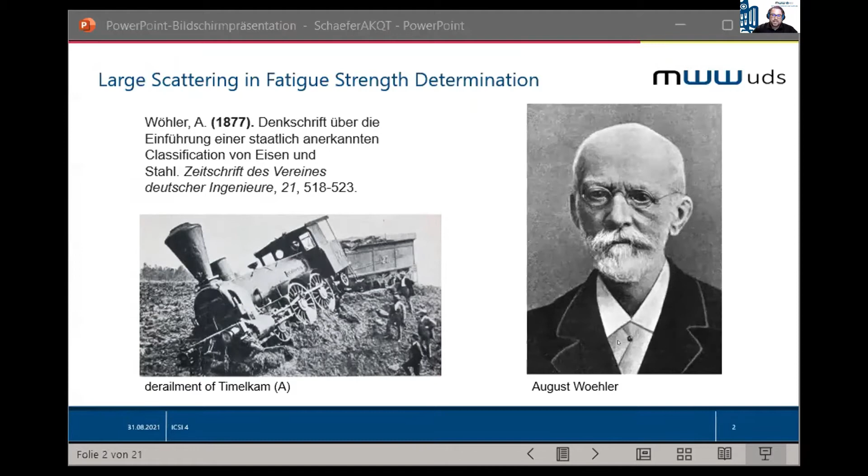And although fatigue of metals had been known since 1842 from Victor Poncelet at the University of Metz in France, the detailed investigation of August Wöhler, published in 1877, marks the birth of modern materials testing. And 144 years later, the testing method is in principle still the same. And that's the main topic of my talk.

If components are designed for applications with fatigue loads, then the fatigue strength is more important than the fatigue lifetime regime for most applications. To say clear, my car should be safe for infinite lifetime. But the fatigue strength regime suffers from the large scattering, you all know that, of cycles to failure and an overlaid scatter in the critical stress amplitude.

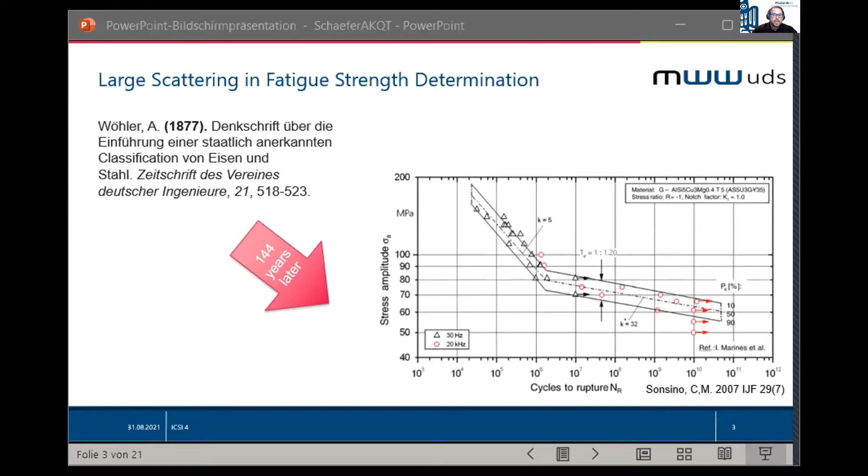So some materials have a fatigue limit of 2 million load cycles, some of 10 million load cycles, and FCC materials, no one really knows. It depends on the size of inclusions or the mechanical contrast between inclusions, maybe billions of load cycles. And for the fatigue strength, different methods, such as the maximum likelihood method or the Hück method, have been proposed and discussed, and they all have in common that at least 10 specimens are needed to get just the mean value of the fatigue strength.

Up to 50 are needed for the scattering bands, and due to the large scattering, fatigue strength testing results in very high cost and high testing times, even with resonance testing systems. And just to point it out, the one specimen test for reliable fatigue strength is like the holy grail of fatigue testing. And for that goal, we want to use the heat generation inside the sample material, resulting in an increase in temperature, to characterize the energy dissipation, and hence to get an idea of the internal processes that correlate with damage.

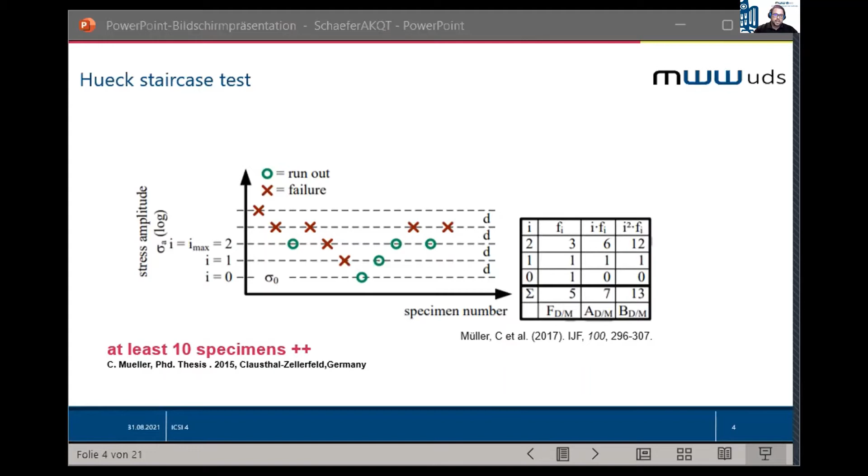This correlation of the dissipated energy, the mechanical hysteresis, with temperature and damage is very old. Even in the 1920s, there were already first attempts. But new technologies such as thermography or sensors with large resolutions open up new possibilities. One base evaluation using thermography was done by Luong et al. They measured the temperature evolution in the middle of a sample in a stepwise load increase test, and they found if the stress axis is logarithmic, as you can see on the left-hand side, the temperature evolution has a knee point, and this knee point can be correlated with the fatigue strength regime.

But measuring just the temperature is not the right way, because if the temperature would lead to failure, then all samples would break in the middle of the parallel length. And we all know this is not the case. We need to measure the heat generation inside the sample during fatigue. And to be honest, if the grips are tempered, the temperature represents the heat generation.

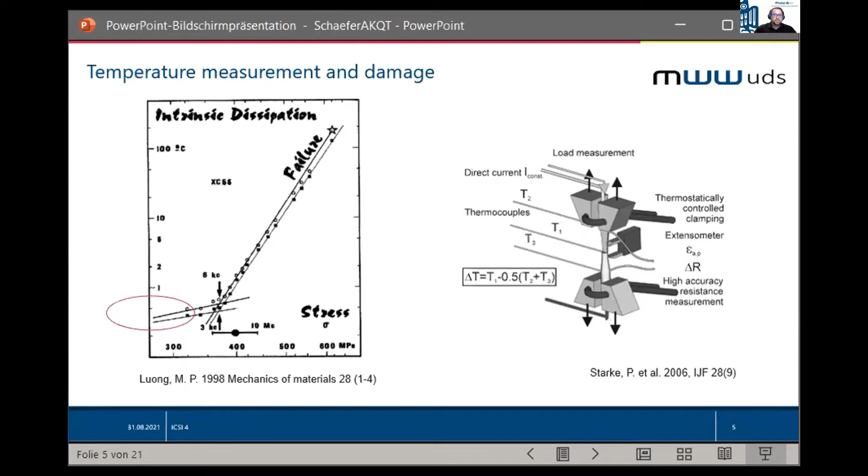But if we go to the fatigue limit, the heat generation is quite small. You can see it here on the left-hand side. It's below 1 degree C. And if we want to know what happens at this point, we need a very, very good resolution. And below the knee point, the temperature increase is in the range of the resolution limit of infrared cameras. And that's the challenge to deal with in this investigation.

So standard techniques for thermometry use thermocouples or infrared cameras, and the thermal resolution is about 0.1 degree C, a little bit better, for example, for lock-in thermography, but it does not reach the resolution of standard thermistors. And what we use in the studies are thermistors with negative temperature coefficients, so-called NTCs. And as you can see on the right-hand side, if the temperature increases about 20 degrees C, the electrical resistance changes from 12 kilo ohm to 6 kilo ohm. And that's the reason why we get this outstanding temperature resolution of about 1 microkelvin.

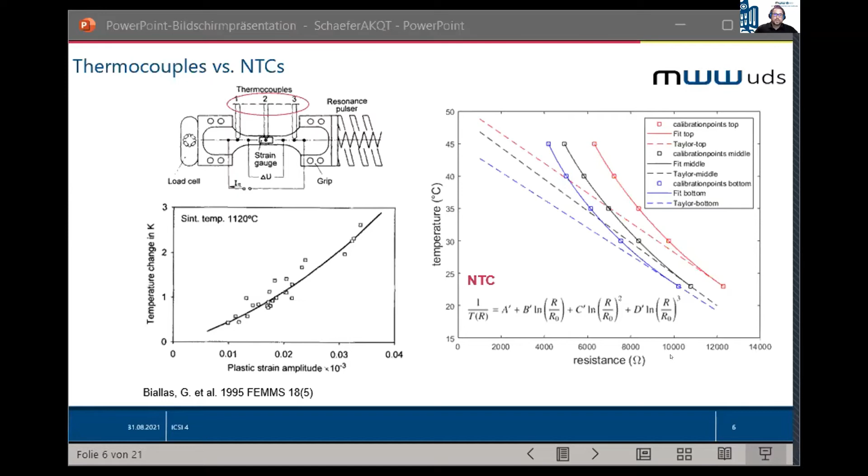But one big problem is that the NTCs are uncalibrated, and each sensor must be calibrated prior to the evaluation in a water bath thermostat, but it can be reused after the tests. So if we now use these NTCs, we have a very low budget, but a very high effort method, because we need to measure the temperature at 3 distinct points on the sample along its parallel length. The idea is to measure the curvature of the temperature profile with just 3 sampling points, because the curvature characterizes the heat generation inside the material.

So if we now consider just this simplified one-dimensional heat equation, and we assume that there is no heat exchange with the surroundings, so we have a good thermal isolation, that we measure a steady state, we have no heat from changes in the microstructure, and the thermal conductivity tensor is constant, and so on, we get the simple solution of this one-dimensional heat equation. It's just a parabola. And already in 1982, Klaus Stärk proposed this method in his PhD thesis, but it was never published in English. We can get an idea of the shape of the parabola just from 3 distinct measurement points.

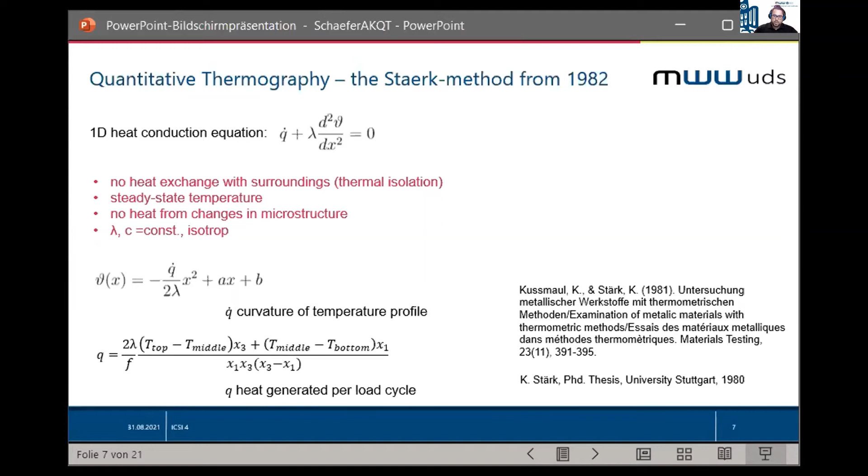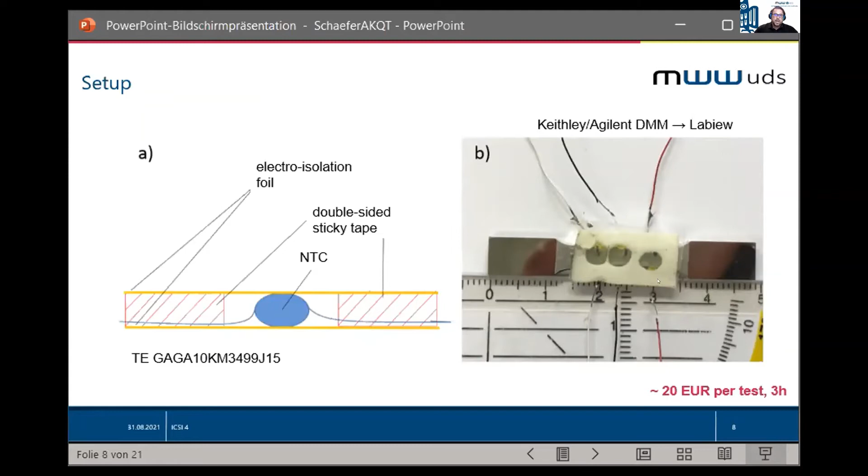So what we do now is we carry out a stepwise load increase test, and we measure the heat generated per load cycle from 3 NTCs. And we pack our NTCs in a package of electro-isolation foil and double-sided sticky tape, put 3 sensors together, and use digital multimeters read out with LabVIEW to get the temperature profile of these small samples.

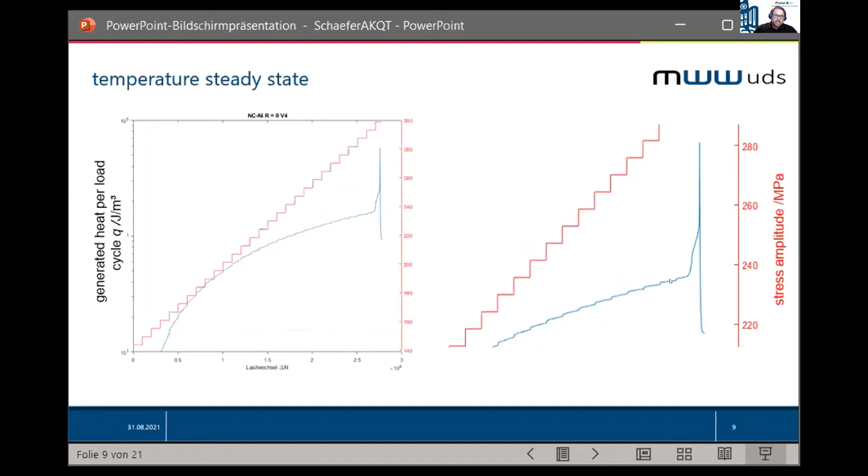So, if we make this load increase test, we must ensure that we get a steady state of the temperature, as you can see here. To achieve a steady state of the temperature, or the heat generated per load cycle, which is the blue curve, we had to wait a couple of load cycles. In this study, it was not enough load cycles, so we have to increase the number of load cycles and the test becomes longer, but it is necessary to achieve the steady state for the further evaluation.

We did this, and then we can contrast the heat generation to the step stress amplitude, and these curves here are gathered. Here you can see the results for aluminum cast alloy from selective laser melting, and of nanocrystalline and coarse grain nickel samples. And for the aluminum samples, there is no knee point visible. That means that the onset of plasticity leads to failure during less than 100,000 load cycles. This was the number of load cycles in one step.

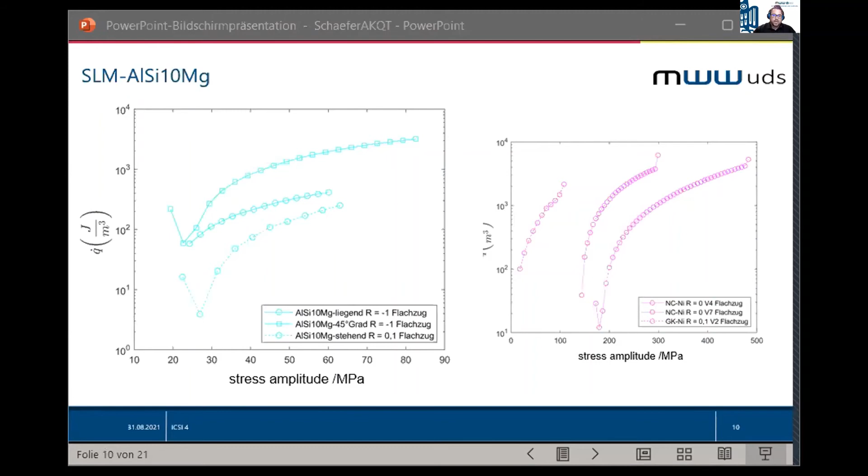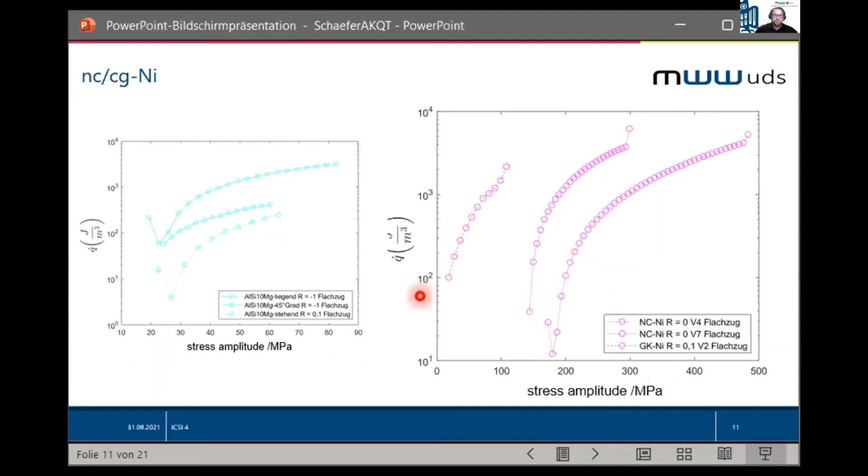So we can evaluate the fatigue strength in only one easy load increase test, even without thermography. That's not surprising because it's a very brittle material. But if we consider the nickel samples, we can see that our nanocrystalline nickel from pulse electrodeposition is a very inhomogeneous material. We get very different results for the stress amplitude, and for the coarse grain material, we get a completely different level of the heat generated per load cycle at the knee point.

So now we wanted to correlate this knee point with a standard evaluation for the fatigue strength, and we did this for low alloyed steel. And what we found is a very good correlation. You can see here the value from a Hück evaluation, the maximum likelihood evaluation, and here the data from the thermometry, and you can see it correlates quite well.

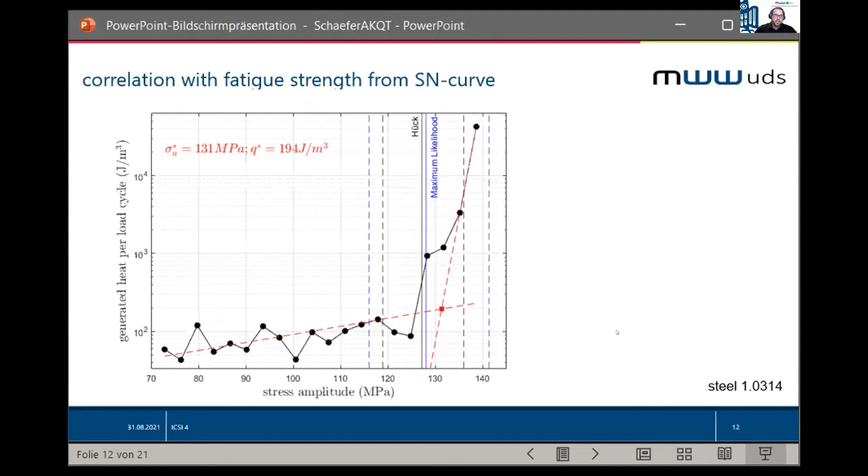If we now consider a standard steel, we see that depending on the R ratio of the test, the stress amplitude at the knee point evolves as expected, and we can see an effect of the upper and lower yield point for the R 0.1 sample, resulting in a step in the Q curve here at the knee point. And this gives clear evidence of the immediately starting dislocation mobility when the upper yield point is reached.

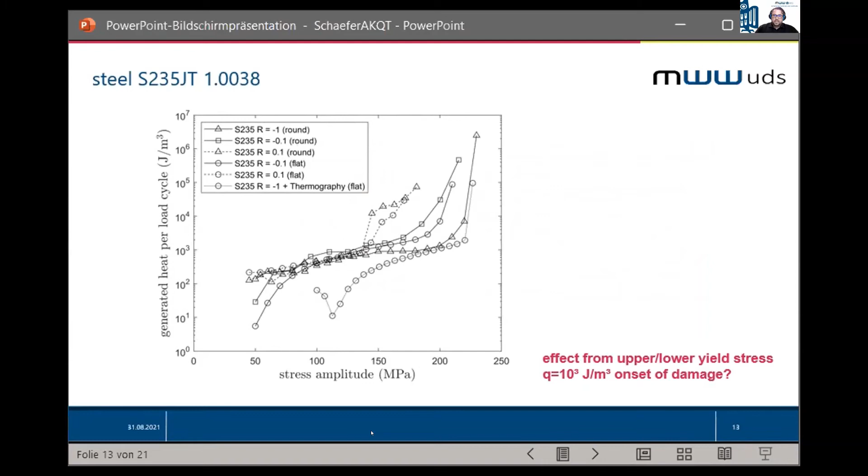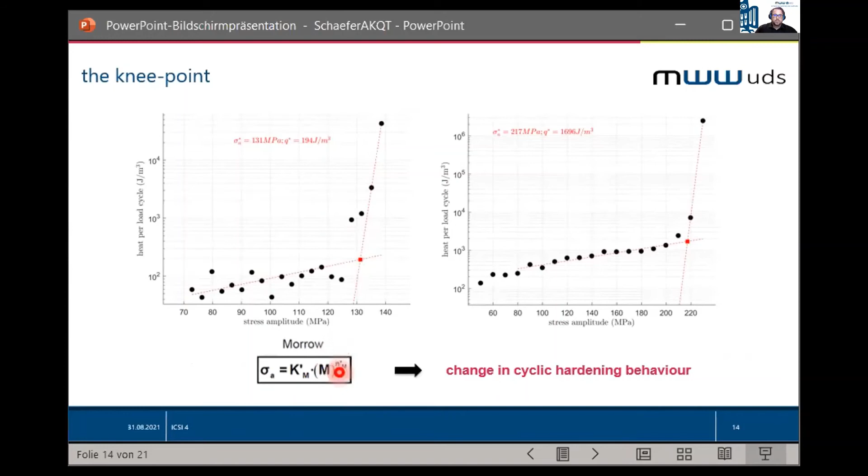So the knee point characterizes a change in the cyclic hardening behavior. That's what the knee point tells us, and we can express a fit to both curves by the Morrow equation, and then we see that the knee point is simply a change in the coefficient of the cyclic hardening behavior.

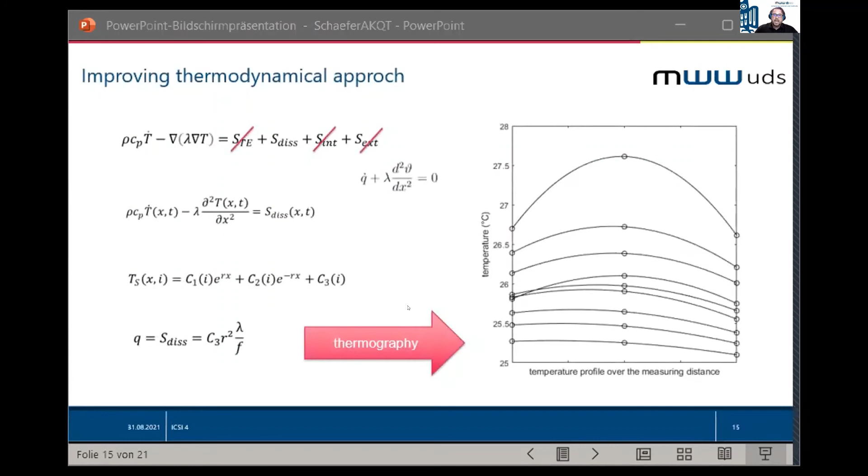So if we now have a closer look at the heat equation, we can also allow for thermal convection effects, but the solution for the temperature profile becomes more complex. We must fit a double exponential solution to the profiles. And we did this using thermography as proposed by Guo et al. They already did it in 2015, and they also found this knee point and a heat increase below the knee point, but their investigation suffered from the bad resolution of their infrared camera. Therefore, they could just measure high Q values, Q being the heat generated per load cycle, of more than 50,000 joules per cubic meter.

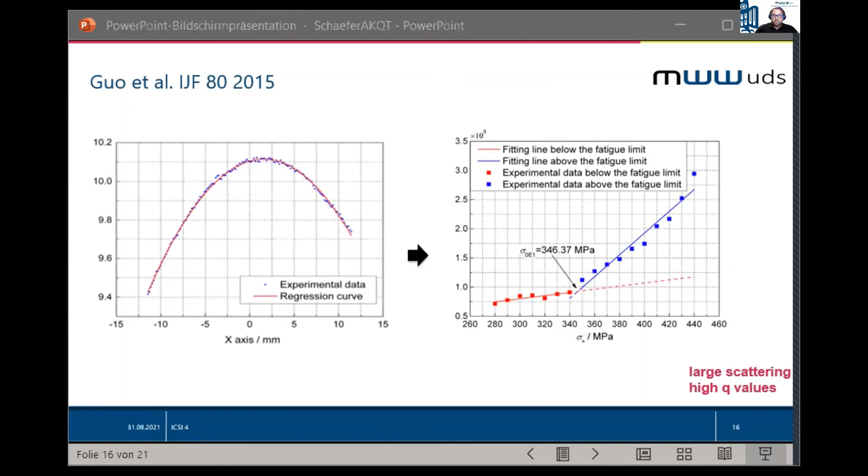In the last step, we did a simultaneous measurement with NTCs and with an infrared camera, of course without the thermal isolation used for the NTCs. And we see the much better resolution of the NTCs in the fatigue strength regime, because 40 millikelvin thermal resolution means that the limit for the heat generated per load cycle is around 1 kilojoule per cubic meter. And that's not enough to resolve the behavior below the knee point.

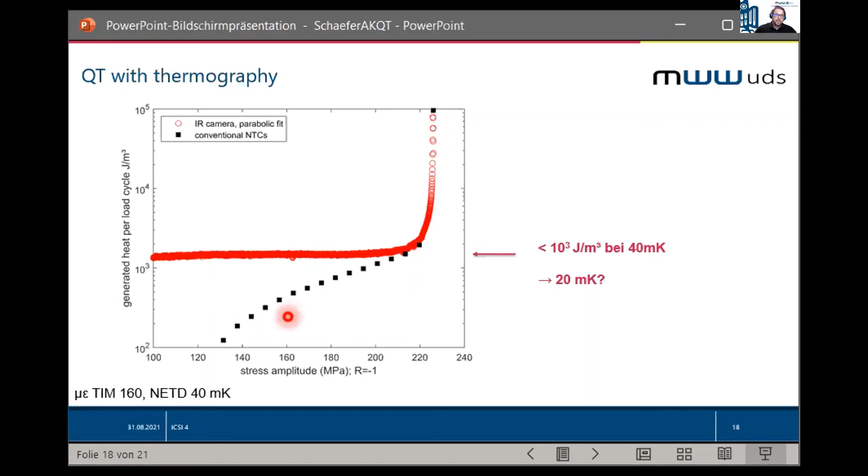So I can conclude that choosing a method is a decision of time and costs for materials with low thermal conductivity and test setups with high frequencies. You can do the measurements with thermocouples or infrared cameras, although the infrared cameras are a little bit more expensive than thermocouples. But if the material has a high thermal conductivity, such as aluminum, and the temperature profile is flat and hence hard to measure, you need NTCs. Also, if the sample is small, less heat is generated, and if you use a servo-hydraulic testing machine, less heat is produced per second, and this makes NTCs necessary to get good and reliable results even below this knee point.

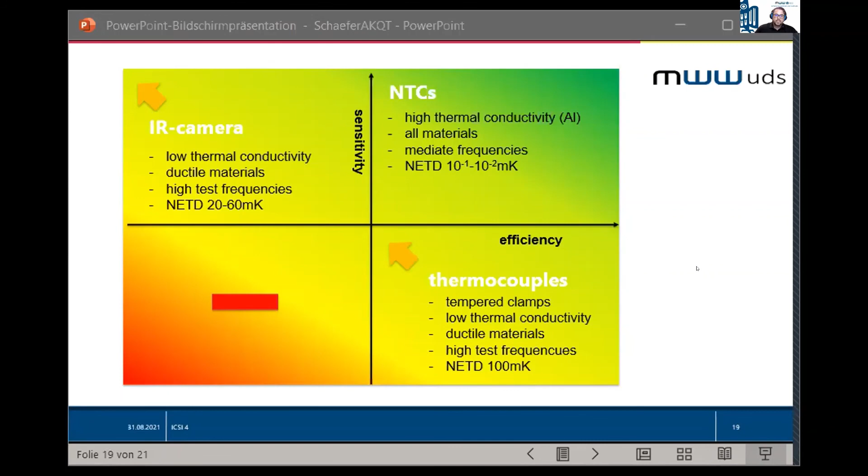But one question remains: what is the link between this heat generated per load cycle at the knee point and damage? This work by Stanzl-Tschegg showed that in the fatigue strength regime, there are several processes that influence the fatigue strength. The knee point is attributed to the onset of dislocation motion, but this is unfortunately not identical to damage. Therefore, we can assume that the knee point stress amplitude is just a lower estimate for cyclic dislocation motion and hence for the fatigue strength, and not the fatigue strength level itself.